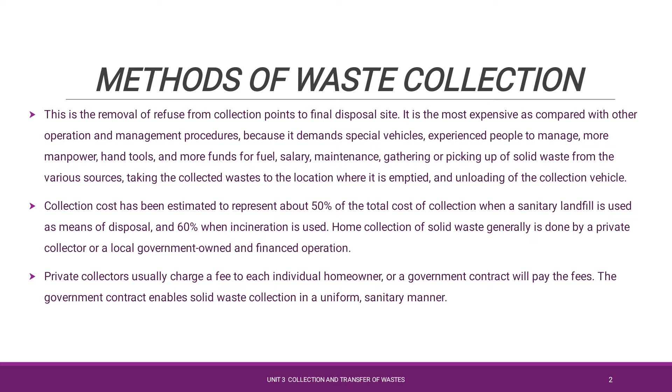These private collectors charge a certain fee to the individual home or the individual lender who gives waste to the collection unit through the government contractor. Based on the money given by the individual owners from each household or residential area, the solid waste collection unit has been formed and proper management of the waste is done in a sanitary manner.

Collection process. The collection of waste is not a single process, since it is divided into 5 different phases. Phase 1 indicates house to dustbin, that is, the waste generated from each premises, from houses and industry, is transferred by the individual people in the industries and the houses to the dustbin. This is phase 1, the house to dustbin collection unit.

Next is phase 2, dustbin to truck, that is, the temporary storage waste in the dustbin is collected by each truck unit, from the government sector or from the private sector. This is considered to be the phase 2 collection process.

Phase 3 is truck from house to house, that is, the truck will move from one home to another to collect waste from the different people living on that particular street. So the truck moves from house to house or collection center to collection center, which is considered to be phase 3. Phase 4, truck to transfer station, that is, the collected waste carried to the disposal site or to the transfer station comes under the phase 4 category.

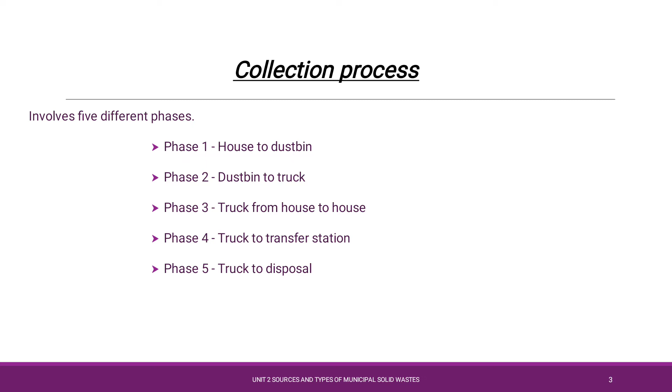The collected waste must be taken to the transfer station, where the larger volume will be collected and transported using bigger transport means. Prior to the movement of the waste to the transfer station, the waste will be sorted as far as possible for recovery or recycling. Then it is carried to the disposal site. The overall process is termed the collection process.

Collection service. Here the different types of collection service are given to residential, commercial and industrial areas. Collection service for a residential area depends on the type of dwelling, from low rise, detached or high rise apartments. The most common residential and commercial services include curbside, set out, block collection, backyard carry service, door to door collection, and alleys.

Curbside, the curb collection. In this system, the homeowner is responsible for placing the container to be emptied at the curb or the roadside on collection day and for returning the empty container back to his house.

Okay, here the homeowner is responsible for placing and returning the empty container. This is a little not satisfactory, since the proper separation or segregation of waste by the homeowner was not done, so the collection member will require more energy or more time to separate the waste which was commingled by the owner.

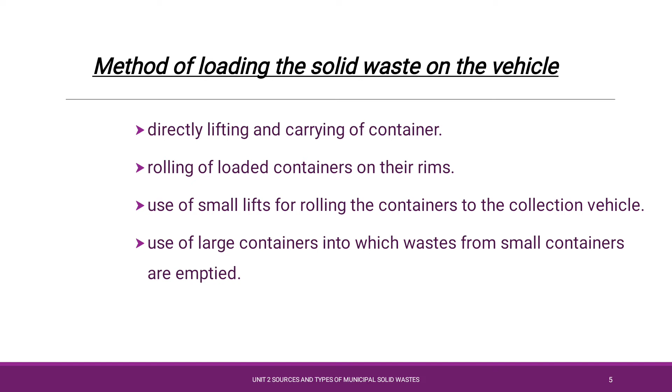After collection, how the solid waste is loaded on the vehicles was discussed here. That is, usually directly lifting the waste from the container and carrying the container to the truck, or by rolling the loaded container on its rim, or by means of a small lift. The rolling container is kept on that lift and taken to the collection vehicle. Then the small containers are carried to the site of the larger container and emptied into the larger container.

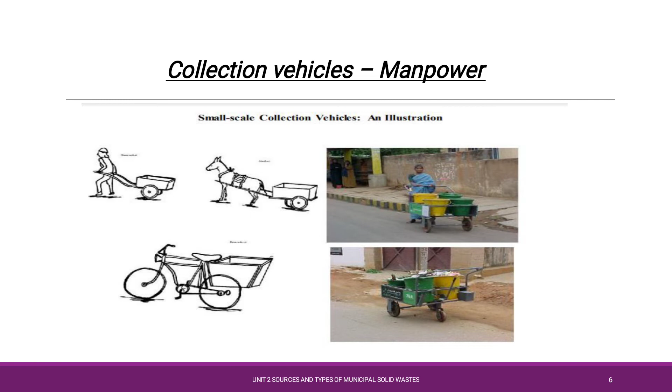These non-compacted trucks are efficient, cost-effective, and highly utilized in small cities. These collection vehicles need a dumping system and easily discharge their waste at the disposal site. They are under a capacity of 10 to 12 cubic meters, and the collection area must be less than 15 kilometers. But if a non-compacted truck is used, the labor cost is a little high. Only the controlling and operating cost is a deciding factor when the collection routes are long and in relatively densely populated areas.

Now let's see about collection routes. Collection routing is the efficient method of routing the vehicles to collect and dispose the waste to the landfill site. Efficient routing and rerouting of solid waste collection is mainly done for decreasing the labor cost of the collection system. Routing is classified into two types, macro routing and micro routing.

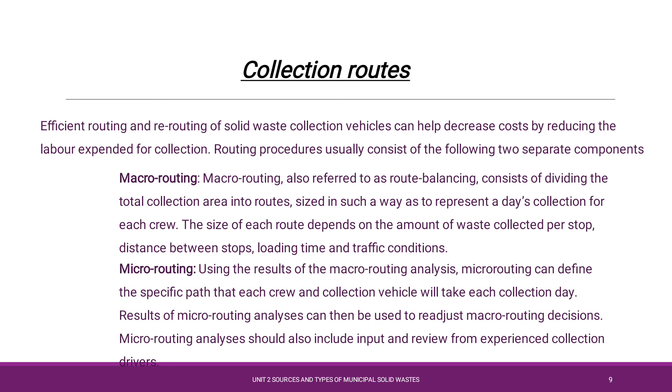During this method of macro routing, the districting has been done for the collection route to be designed. So the large area is divided into small subdivisions so that the collection of this municipal solid waste can be made very easily. So the total collection plus the hauling time should be constant for each route in the community.

So in order to avoid heavy traffic or heavily visited places during the rush hours, these collection routes must be placed in a nearby area of the transfer station. So at the end of each segment of the collected area, the street must intersect with the main service road of the transfer station.

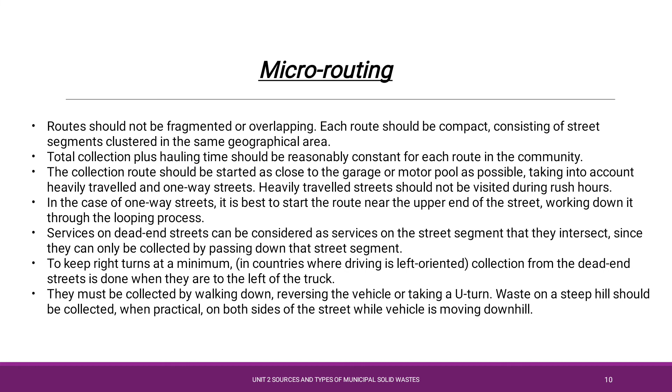So they must be collected by walking down. If a huge number of subdivisions or districts is available, the collection routes must be designed so that they can collect the waste by walking down itself. In case of steep hills, U-turns etc., the vehicles are difficult to move and reverse. So in such a condition, the way has been chosen for the manual collection service.

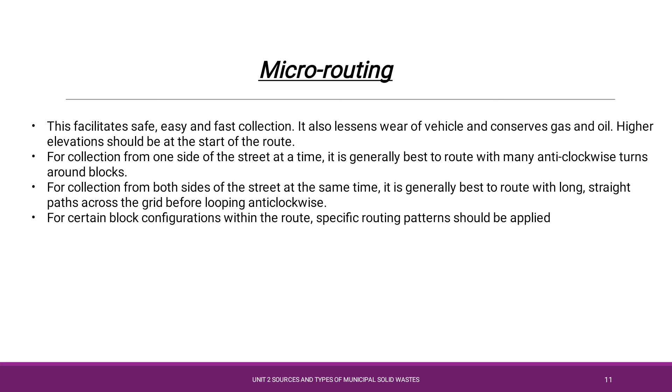So this type of routing is very safe and very easy to collect, and also it may consume less gas or oil for vehicle usage. So this type of collection can be done from one street to another street at any time in both directions, clockwise as well as anti-clockwise. Only the specific route and specific pattern of collection must be followed. It may enhance the collection efficiency compared to macro routing.

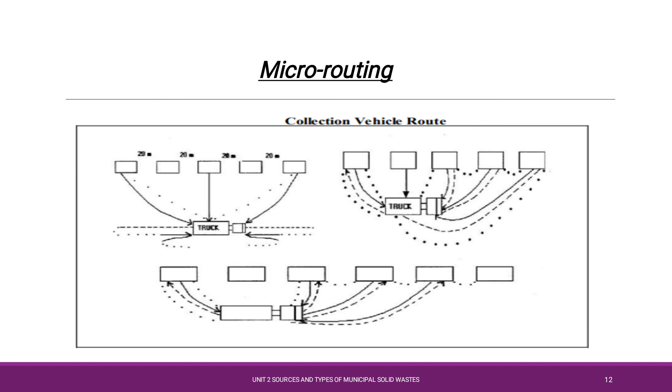From each of the 4 divisions, the waste has been collected; this districting process has been done for collection. In the last section, there will be an intermediate junction in which the collection vehicle won't run. From this intermediate junction, the waste has been collected by the crew members by walking to the place where the collection vehicle can pick it up, and from there the waste has been collected by the truck and moved. These are all the micro routing techniques.

Then analysis of the waste collection system. Usually the collection has been done in a mechanical manner. By using this mechanical manner, waste collection can be developed, and it may reduce the collection cost also. And also the separation and collection activities require proper design, and relationships must be maintained, along with the variables associated with the controlling capacity of the vehicle, and proper modeling must be done prior to

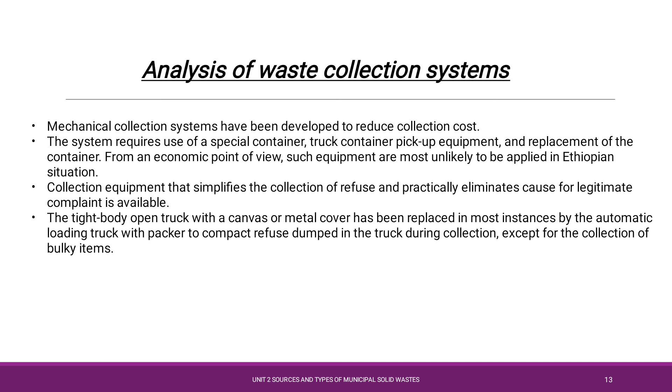the collection. So the equipment must be easily and readily available, and the proper operation of this vehicle must be learnable by the truck operator. This type of collection system is classified into 2 types, that is the hauled container system and the stationary container system.

In case of the hauled container system, the haul time represents the time required to reach the disposal site starting after a container whose contents are to be emptied has been loaded on the truck, plus time spent after leaving the disposal site until the truck arrives at the location where the empty container is to be deposited. However, it does not include time spent at disposal.

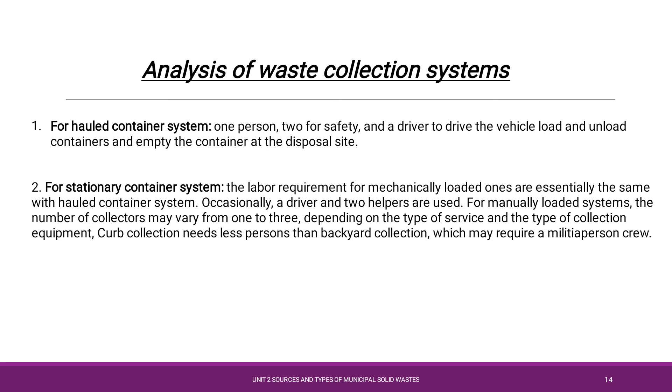In case of the stationary container system, it is the time required to reach the disposal site starting after the last container on the route has been emptied or the collection vehicle is filled, plus the time after leaving the disposal site until the truck arrives at the location of the first container to be emptied on the next collection route. So curb collection needs fewer people. So manual loading is highly utilized for the stationary container system.